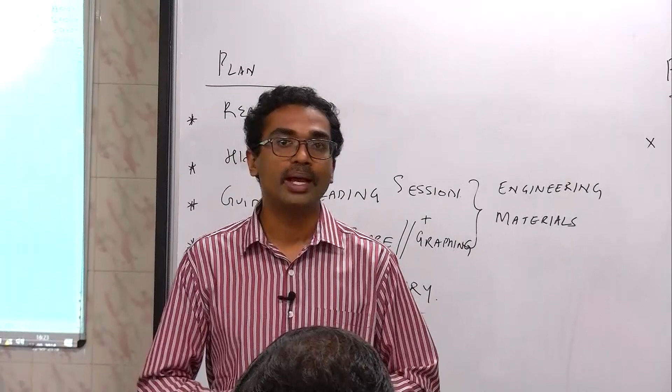I would like to start off by making another note for teachers who might be watching the Swayam course. And this comes from a question that I have been asked very often when I have conducted faculty development programs in this very room in the Teaching Learning Center here at IIT Madras. I have very often been told explicitly by teachers who work in various universities, polytechnic institutions and so on, that active cooperative learning seems to be a very nice technique. However, achieving the goals of ACL while also honoring the university requirements, particularly the syllabus completion requirements, can be a challenge. I agree, that's a challenge.

One way in which I can think about a creative solution to this problem is by basically giving some onus to the students for their own learning as well. And this is very important to the principle of andragogy. By that what I mean is we are very often dealing with adults in a university setting, so we should make them owners of their own learning.

So one thing that can be done is use ACL in order to set the framework, the scaffold for the lesson that needs to be covered as prescribed by the university, and not necessarily spend a lot of time describing everything that is there in the syllabus, but spend a lot of time trying to establish the cornerstone ideas, and then provide guidelines to the students, and also provide a framework so that the students can introspect and self-correct, do course correction and so on. So that might be a much more efficient way of integrating ACL into our classrooms.

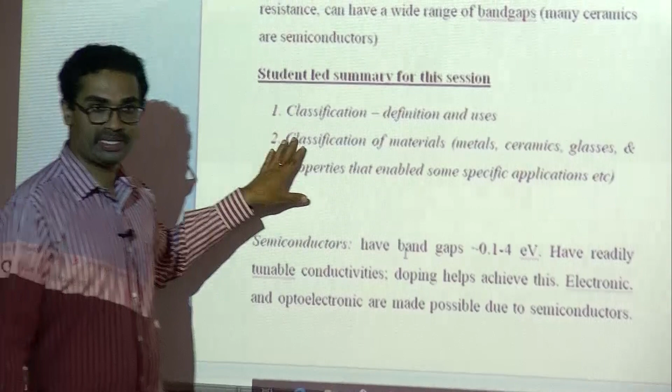So a quick recap. If you recall, these are what you yourself said were the points that summarized the last session. Briefly, we looked at what classification means and how classification can be important in any academic discipline, to consolidate information in a very structured manner. And then we looked at some classifications of materials. We did not look at all classifications of materials. We basically described metals, ceramics and glasses. We did not go much beyond that.

But I did give you some homework. So if you can give me the outcomes of that homework, if you have looked for information, that will be relevant. I remember that I asked you to look at thermal and electrical conductivities of a wide range of materials. So maybe ceramics, some ballpark values, metals, some ballpark values, polymers, again some ballpark values. So if you can give me some numbers, that will be nice.

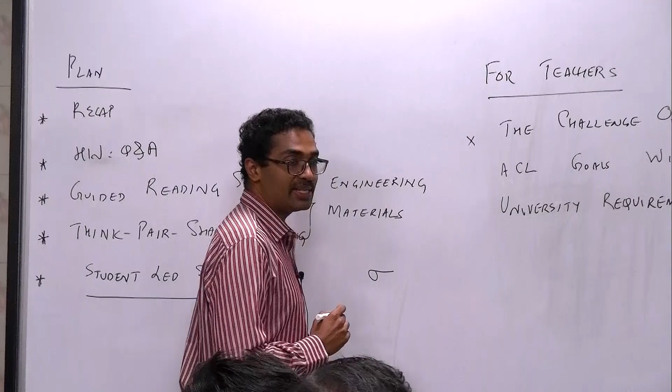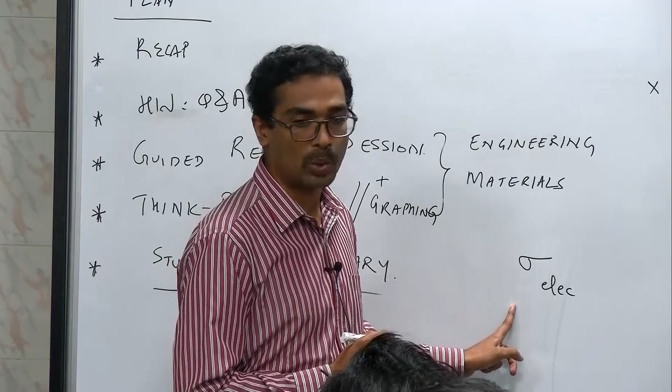So typically the electrical conductivity is represented by sigma. Now this can be a little confusing, isn't it? Because in the last class I used sigma for describing stress. So just to make a distinction, I will call this sigma elec. So this is the symbol that we will use in this course for electrical conductivity, and kappa is going to be used for thermal conductivity. So this is what we will be using for electrical conductivity, and this is what we will be using for thermal conductivity.

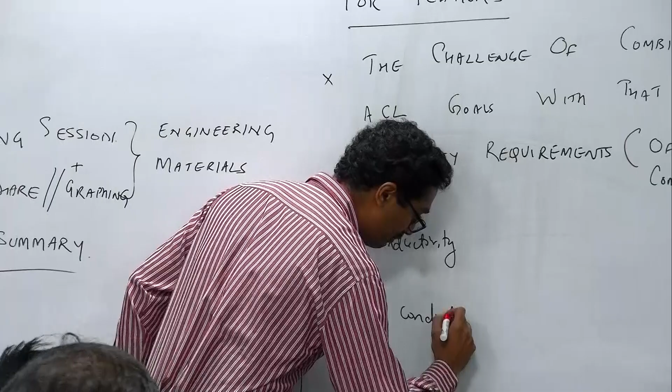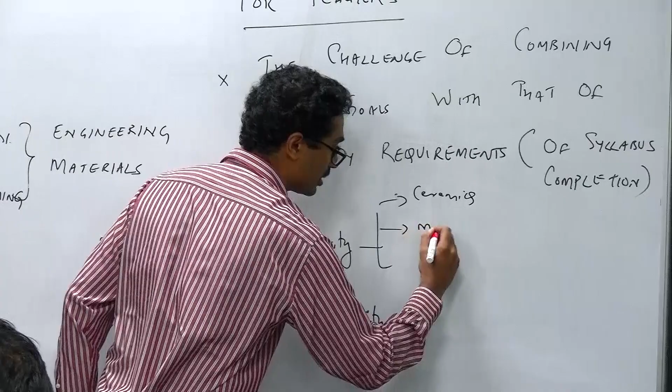So can you give me some values? I am sure you would have seen some databases and so on. So maybe for ceramics, some values, metals, some values, maybe polymers, some values. How many of you had a chance to look at these values? If you have not, maybe I'll give you a minute or two to use the internet and find these ballpark numbers, okay? And you will have to give me units in every single case. All right?

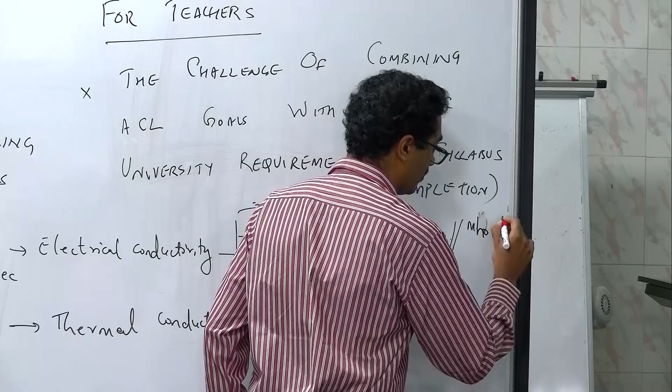So for metals it is 10 to the power of 7. Siemens is also called ohm inverse or mho. All right, so I will write it. So this can also be mho meter inverse, right? So this is Siemens or mho meter inverse.

Very good. So did anybody get the values for ceramics? 10 power minus 9. Wow. See how different it is, isn't it? So it's, let's say, 10 to the power of minus 9 units. Same, Siemens per meter. So how different are these powers? 10 to the power of 16, right? So there are cases wherein this ratio goes up to 10 to the power of 20 and more.

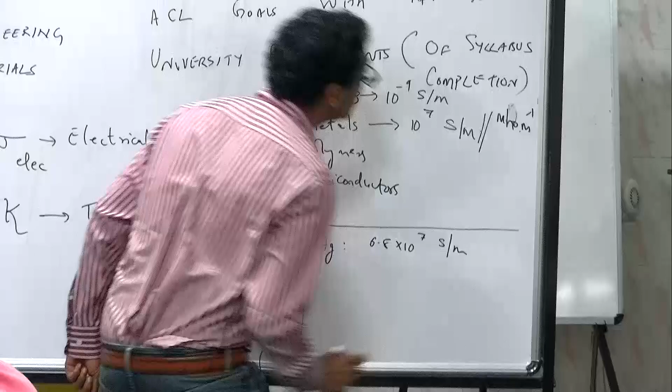So if I look at the conductivity of the best metal, let us say silver, and the conductivity of the worst ceramic, let us say quartz. So why don't you give me those two numbers? Spend some time looking at your search engines. Okay, you want to give me silver's sigma. All right, please. 6.8 times 10 to the power of 7 Siemens per meter. Now that's similar to what you have given, right? This is also about right.

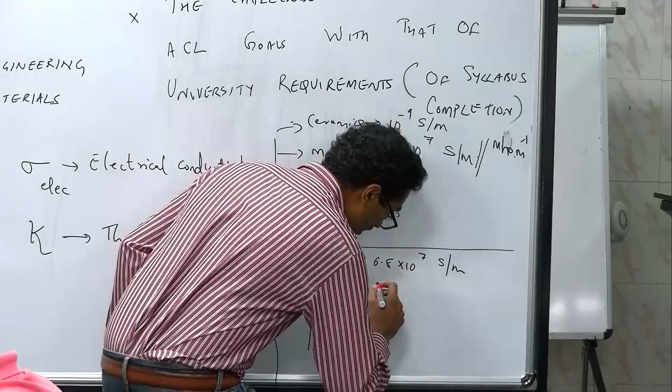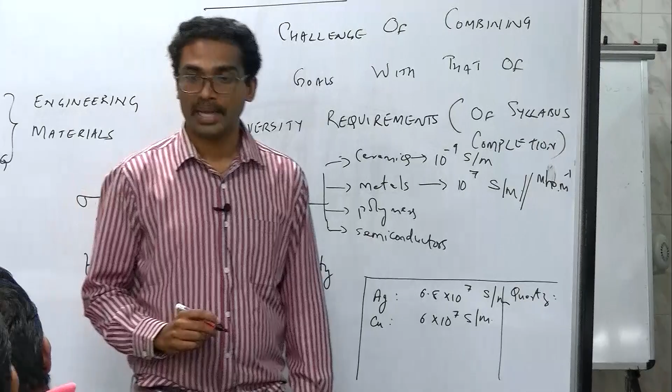And copper. Okay, you want to give me copper's also? 6 into 10 power 7. 10 to the power of 7 Siemens per meter, fine. Now let us look at some ceramics. So let us say quartz. What is the value? Quartz, electrical conductivity. So this is electrical conductivity: 10 to the power of minus 18 Siemens per meter.

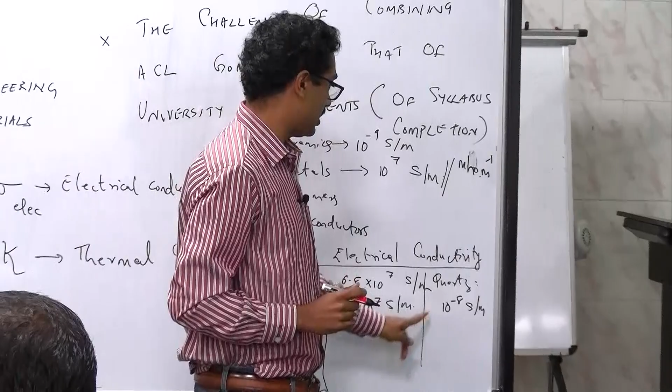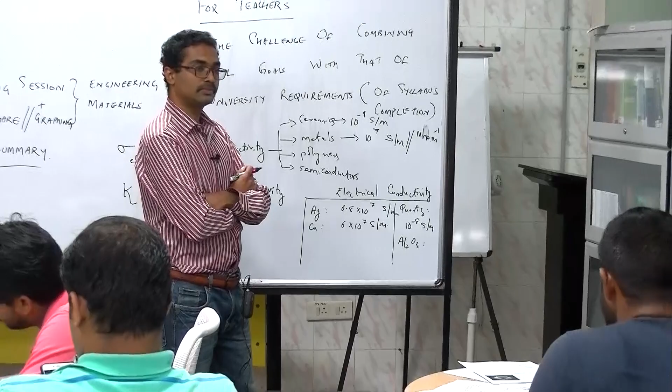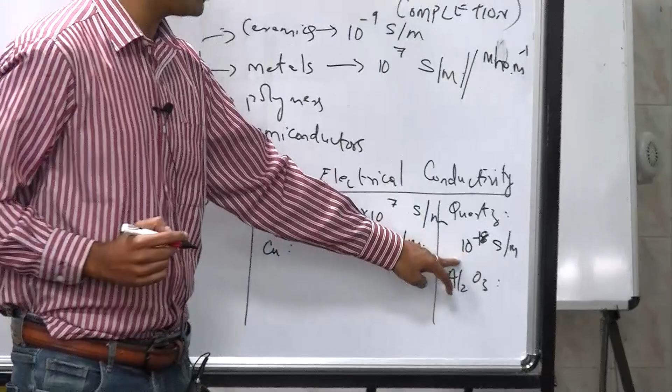Wow, look at this. And let us say alumina. Can you look at alumina, Al2O3? It's not 8, it's 10 to the power of minus 18. So the quartz is 10 to the power minus 18. Okay, all right. So if you take the ratio, it is 10 to the power of 25. Incredible, isn't it? A physical property varying over 25 orders of magnitude. Amazing, isn't it? 10 to the power of 7 here, and here is 10 to the power of minus 18.

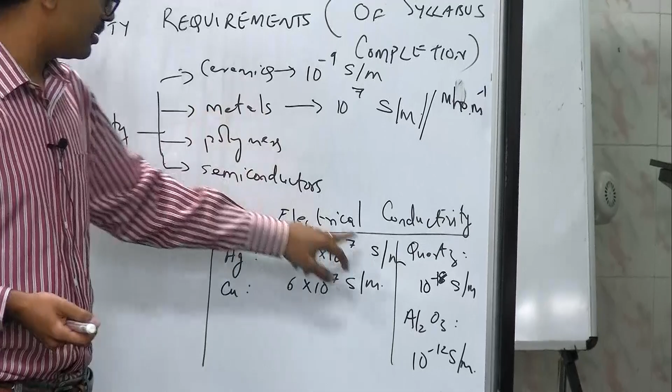Okay, alumina. This is 10 to the power of minus 12 Siemens per meter. All right. So, of course, the lesson learnt is, what is the SI unit of conductivity? Siemens per meter. For ceramics, the conductivity can be as low as 10 to the power of minus 18 or even lower. In the case of alumina, it is 10 to the power of minus 12. If you take the ratio between the conductivities observed for metals and ceramics, it can be as high as 10 to the power of 25.

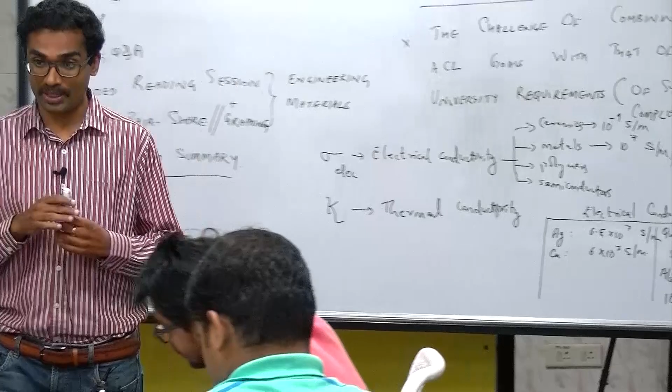You can see that. And in fact, there is no physical property which in SI units actually spans such a wide range. There is absolutely no other physical property, whether it be specific heat capacity or thermal conductivity and so on. Nothing spans this extraordinary range of values like electrical conductivity does. So electrical conductivity, measured in SI units, offers the widest window in the world of materials.

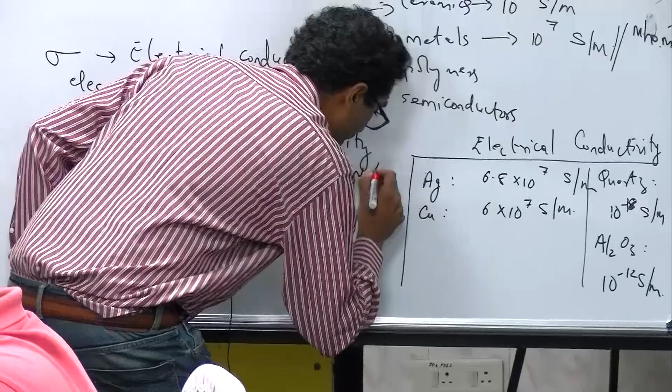All right. So let's look at thermal conductivity now for the same materials. Silver is like 419 watt per meter Kelvin. So what is the SI unit of thermal conductivity? Watt per meter Kelvin. Very good. So this is 419, and copper is 385. So not that different after all.

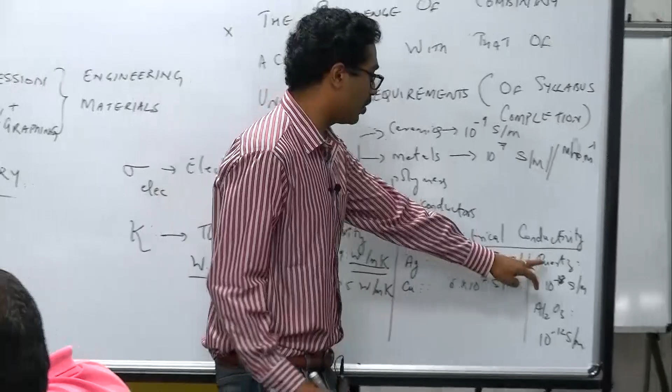Okay. Now for quartz, why don't you also look for some numbers? Let's give people 1 minute. You can distribute the load. One of you can do quartz, the other can do alumina. Thermal conductivity. Let people spend some time. It's good to know how to use search engines to gather information.

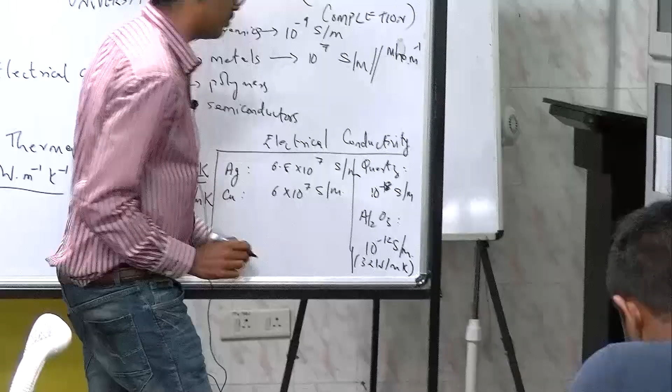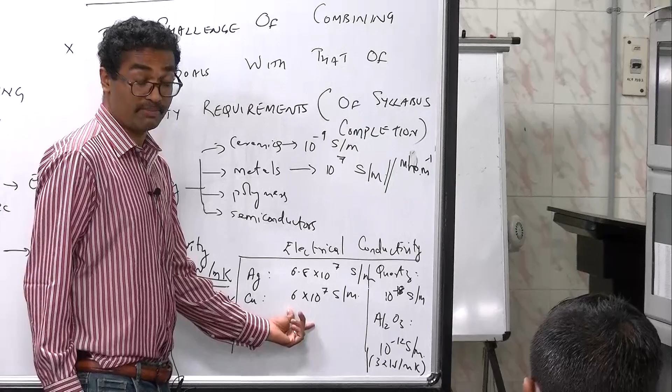Right. Similarly, I told you a thumb rule last time about tensile versus compressive strength of ceramics. What did you see in the last class? Electrical conductivity is more as compared to thermal. Oh, much more. But you see, the units are different. Here it's watt per meter Kelvin, here it is Siemens per meter. In Siemens per meter, silver and copper have very high electrical conductivities, 10 to the power of 7 with some prefactor. Quartz is very small, 10 to the power of minus 18.

And look at the ratio. It's going to be 10 to the power of 25, right? But if I look at the ratio of the thermal conductivities, the thermal conductivity of metals is higher, roughly 10 times higher than that of ceramics. Did you notice that? Likewise, in the last class, I told you something about strength. So, compressive strength of ceramics versus tensile strength. Which one is higher?

So what is the typical tensile strength that you saw? 500, 400, in units of megapascals. Okay. Compressive? That is 5,000. 5,000. And what about Young's modulus? That is gigapascal. It's in gigapascals, right? How many gigapascals? 450. So a few hundred gigapascals.

So roughly 1/1000th of the Young's modulus is the tensile strength. Is that correct or wrong? 1/1000th, correct. And 10 times the tensile strength is the compressive strength, roughly. So these are thumb rules that you might actually benefit from. Alright, so shall we also do the similar exercise for polymers and semiconductors? Because that will enable us to go through the write-up very easily.

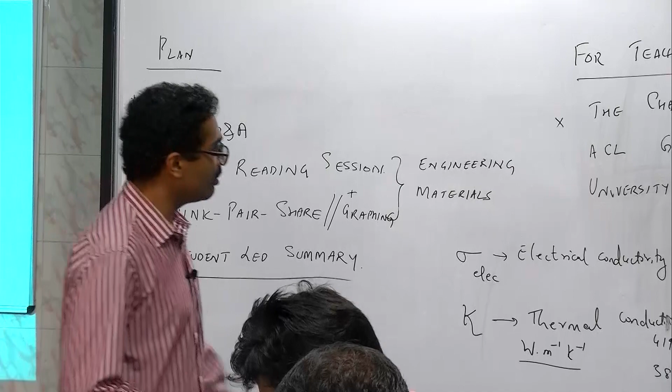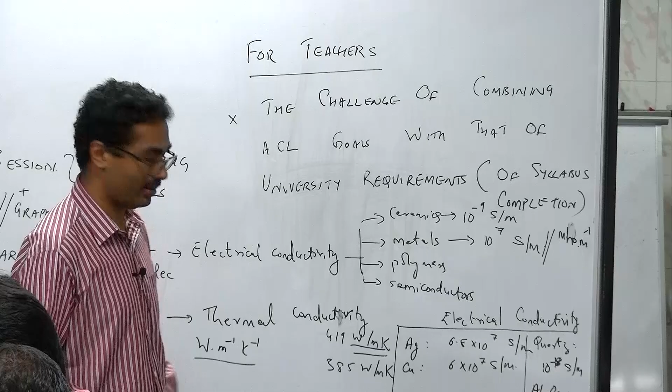Alright, so spend 1 or 2 more minutes, discuss with one another. You can load share. Some of you can do for polymers and some of you can do for semiconductors, but then tell me the numbers together. So remember there are a wide range of polymers. Please spend some time looking at the sigma and kappa values for polymers and semiconductors. Polymer is 2.23. No, you write down and I'll come around. But all of you understand what you are expected to do, right?

Good. So, a characteristic of semiconductors is that their conductivities again vary by a wide range. And in fact, semiconductors can have tunable conductivity. For example, silicon versus doped silicon. Doped silicon can have very high conductivity when compared to silicon. So look at, let us say, N-type silicon, P-type silicon, just silicon. Similarly, some semiconductors other than silicon. I have given some formulae here: gallium arsenide, gallium phosphide, indium phosphide, indium arsenide, silicon carbide, silicon.

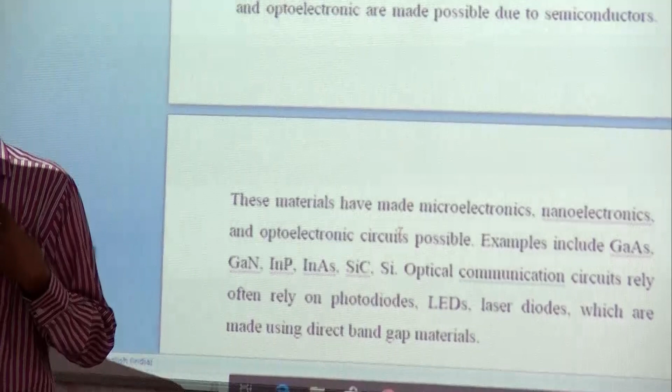So you can choose 2 or 3 of these. When they are N-type, what is the conductivity? When they are P-type, what is the conductivity? Intrinsic, what is the conductivity? You can take any one material and tell me the values, okay? Because that will give you an idea of why semiconductors are so widely used for electronics. And the reason is because you can actually tune their conductivity over a wide parametric window.

So what are you all doing now? You are looking at the thermal and electrical conductivities of polymers, correct? So you'll have to tell me what the polymer is. So polymer, both thermal and electrical conductivity. Similarly, semiconductors. For semiconductor, you'll have to tell me the formula. You can choose one of the formulas that I have given, and then tell me the thermal and electrical conductivity. Ideally for doped and undoped cases, because that will be interesting.

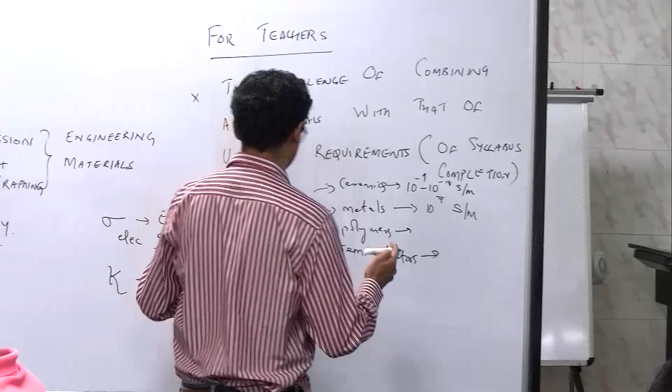So, do you have the values? Yes, sir. Thermal conductivity. Okay, very good. So, polymers, you can tell me the electrical conductivity first, typical values. Thermal conductivity, okay, tell me. PTFE is 0.25. So PTFE, that is polytetrafluoroethylene. Very good, yes. 0.25 watt per meter Kelvin. Very good.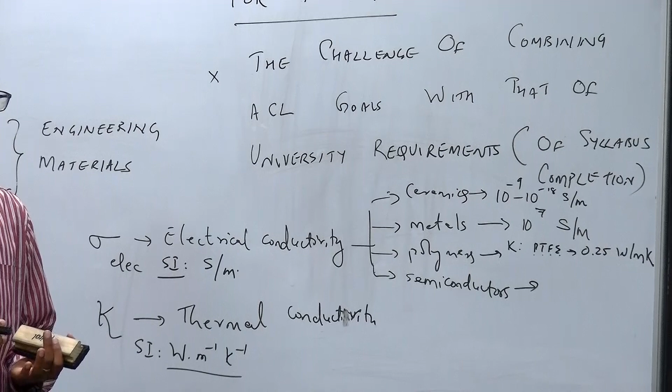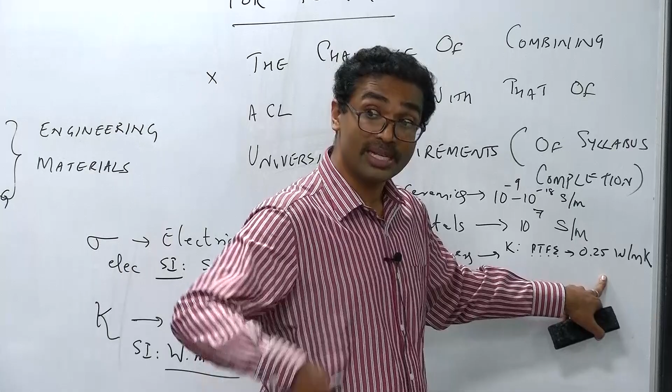Now, compare that with the earlier value. Earlier, what was the value you got for ceramics? Ceramics, it was like 32. 32. So, ceramics was a good 100 times better than polymers as far as thermal conductivity is concerned. And metals was 10 times better. So, polymers are 1/1000th as good thermal conductors when compared to metals. Ceramics have a thermal conductivity that is 1/10th that of metals in SI units. And polymers, it's very fractional, 0.25.

So now can you put some reason to that kitchen experiment that I told you? You can use kettles, but to prevent burning, you can use plastics. And the reason is because plastics are insulators. Their thermal conductivity is 1/1000th the thermal conductivity of metal. So they don't conduct heat, and as a consequence they protect you, right?

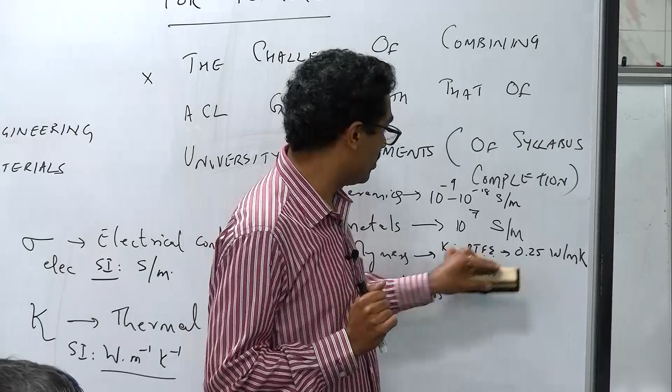So very good. Now let us also write down the thermal conductivity and the sigma elec value. Less than 10 to the power of minus 12 Siemens per meter. Okay. So would you consider them to be insulators or conductors? So conductors are like metals, no? 10 to the power of 7.

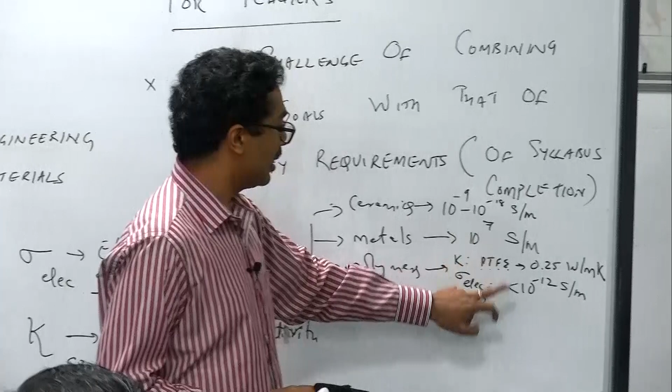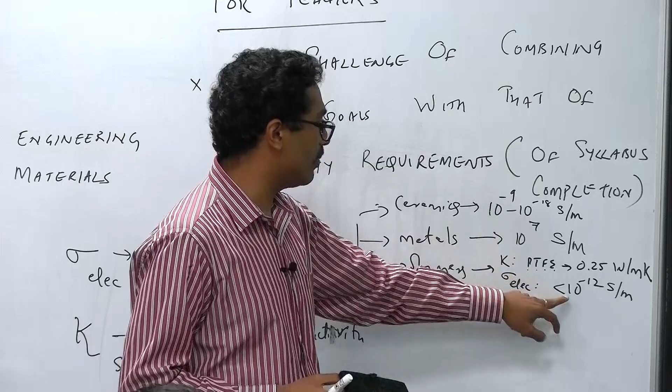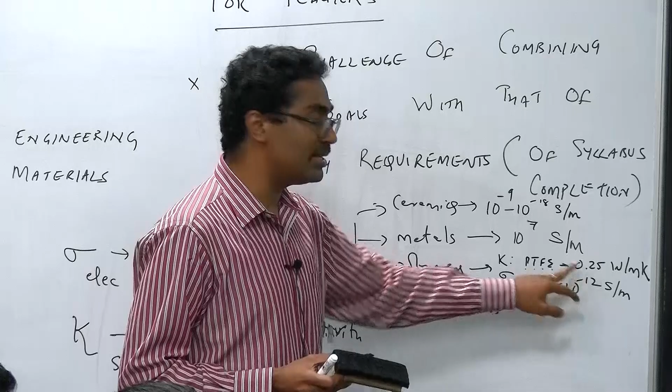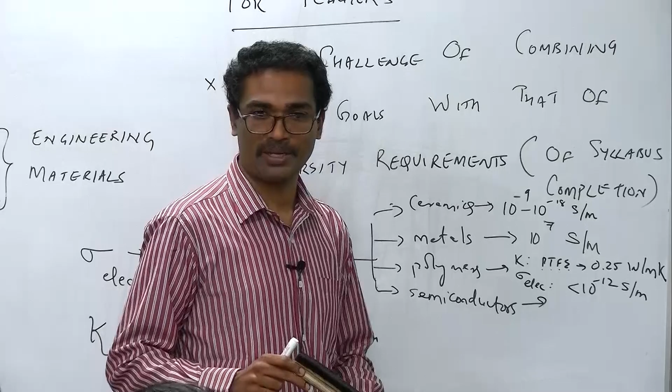Ceramics, you see, you have a value of 10 to the power of minus 18 to 10 to the power of minus 9. It's a very wide window, correct? Now, polymers, you will find that this is by and large the window. But then there is a category called conducting polymers. Why don't you look for the conductivity associated with a conducting polymer, just any conducting polymer. There are a wide range of conducting polymers. They are called PANI, for example. There is polyaniline, polyacetylene, and so on.

So take a look at the sigma values for the same. Is it clear to you what I am asking? So there are a category of polymers called conducting polymers. Let us look at the sigma elec, that means the electrical conductivity measured in Siemens per meter or mho meter inverse. Do you have some number? Just any number. It could be for any of the conducting polymers out there.

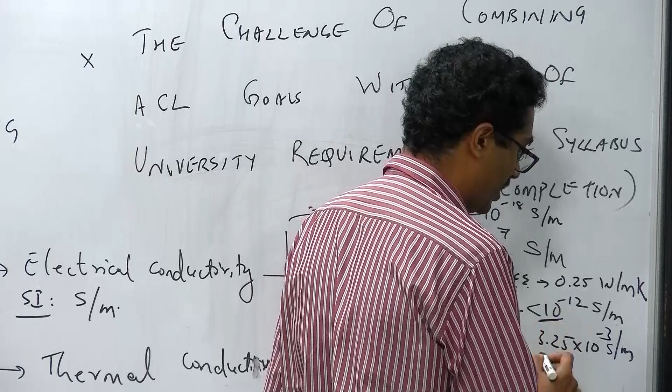It's like 3.25 into 10 power minus. Yes. Tell me. 3.25 into 10 to the power of? Minus 5. Siemens. Wow. Look at that. Siemens per centimeter. So can you convert Siemens per centimeter into meter? Minus 3. Compare this, 10 to the power of minus 12 with 10 to the power of minus 3. So it's a billion times better than other polymers. And in fact, it is much better than most ceramics.

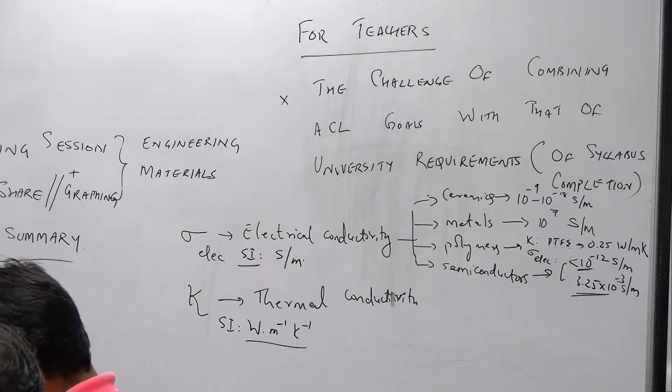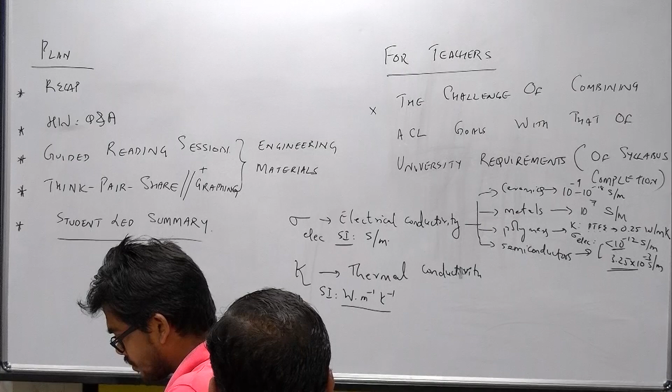So there is this interesting class of polymers which has a billion times higher electrical conductivity. Right? The typical polymer has an electrical conductivity of 10 to the power of minus 12 Siemens per meter, this one has 10 to the power of minus 3 Siemens per meter. It's a billion times higher. It's tremendous. Okay, and it might be interesting for you to actually think how this is possible. How can you change a polymer so that it has a billion times more conductivity? It's very dramatic, isn't it? In fact, it's better than almost all of those ceramics. The only thing that it is not better than is metals, correct?

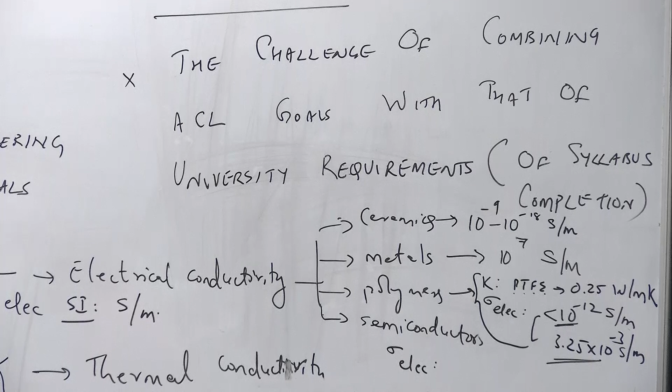Okay. Gallium arsenide, it is 52 watt per meter. So, one second. So, that is comparable to any other ceramic, correct? Because the thermal conductivity of these compound semiconductors is comparable to whatever you found for ceramics. So, no surprise there. Alright. Now, let us look at the conductivity values. For gallium arsenide, let us say intrinsic, p-type, n-type. You understood? So, why don't you discuss it? Show one another your numbers that you are getting. Please discuss with one another.

You can choose your own compounds. It can be gallium arsenide, gallium nitride, indium phosphide. All of them have a property called band gap, by the way, that can vary quite a bit. Yeah, you write down. I'll ask you.

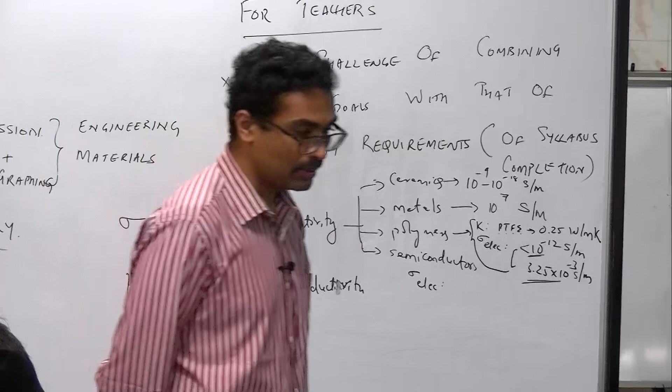You understand the question, right? It's very straightforward. The question is electrical conductivity for a semiconductor, its intrinsic type and n and p type. So, the intrinsic type is the pristine semiconductor, absolutely pure. Yeah.

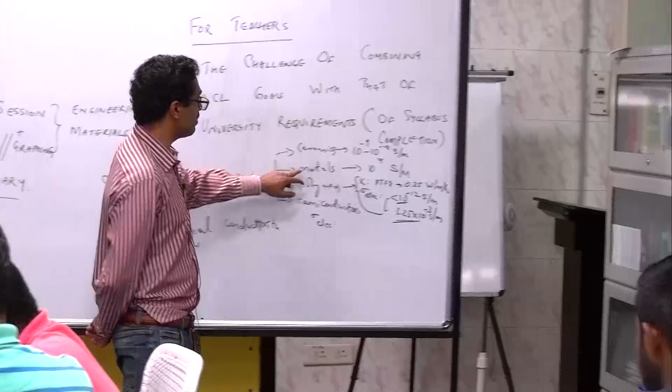See, that is very dramatic, isn't it? For gallium arsenide, that's something that I want you to register. So, it can be as little as 10 to the power of minus 8, as high as 10 to the power of 3 Siemens per meter. So, it is somewhere between a metal and a ceramic. It is much better than the best ceramic, okay, but it is not nearly as good as a metal. So, it can be 10 to the power of minus 3.

So, these conducting polymers, can you call them semiconductors? Absolutely. So, can you have polymers that are semiconducting? The answer is yes, indeed. In fact, I saw some polymers they are using for water splitting. Yes, that's right. So, absolutely anything that you can use a semiconductor for, you can in principle use these conducting polymers, semiconducting polymers. So, they are not really conducting like metals conduct, but they conduct more like semiconductors conduct.

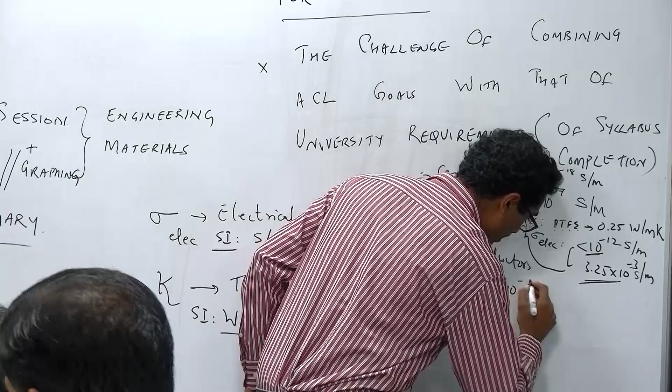Okay. So, that is interesting, isn't it? So, what are the values? Let us say for gallium arsenide, what is the value that you found? 10 to the power of minus 8 to 10 to the power of 3 Siemens per meter. Wow, that is a huge window, isn't it? So, there is no other material that shows this 10 to the power of 11 ratio between the highest conductivity that it can show and the lowest conductivity. That is the special thing about semiconductors.

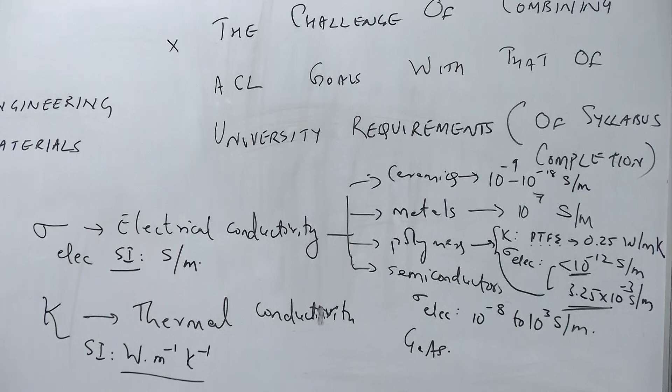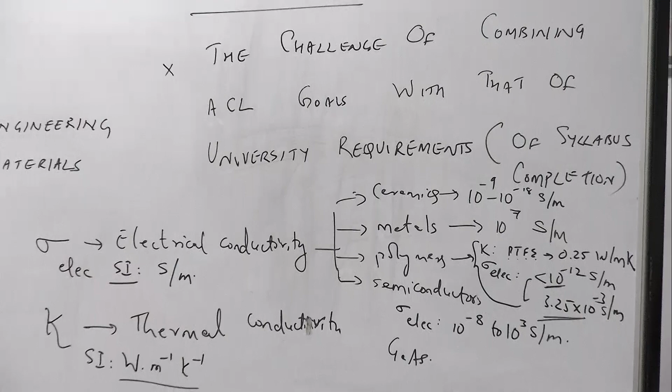Semiconductors, their conductivity can be tuned over a very wide range. Here, you are tuning it over 10 to the power of 11, 10 to the power of 12, basically 11 orders of magnitude, 10 orders of magnitude. Can you look at the sigma for silicon? So this is for gallium arsenide. Silicon, what is it? 10 to the power of minus 4 Siemens per meter to how much? 2.2 Siemens per meter. So this also is basically over 10 to the power of 4, right?

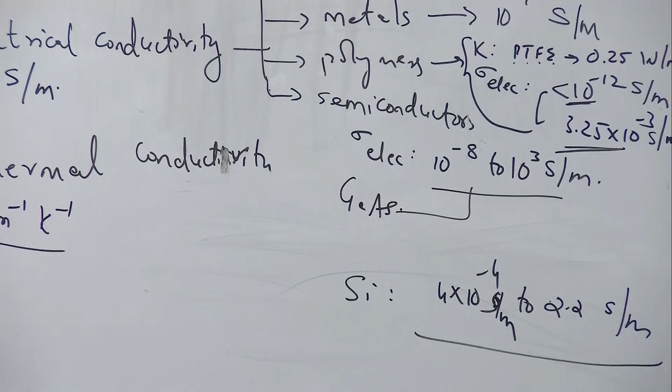So it's very huge. So you can modulate the electronic conductivity, the electrical conductivity of these semiconductors. That's really what makes these semiconductors very special. In fact, that is what enables us to use them for a wide range of applications in microelectronics, nanoelectronics. The precise details we can discuss later.

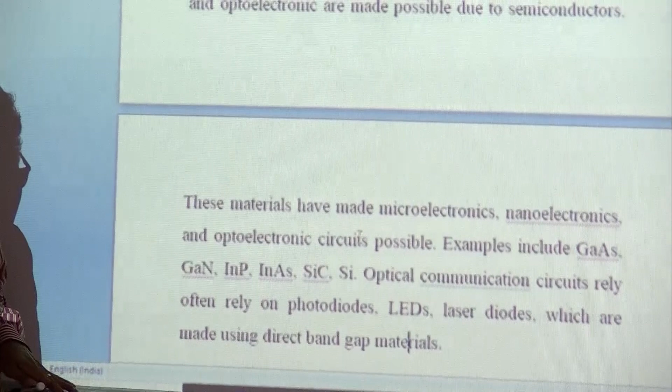But without this ability to modulate the electronic conductivity of semiconductors, it wouldn't be possible to build microelectronic devices, including things like diodes, transistors and so on, nanoelectronic devices, optoelectronic devices and circuits and so on. It just wouldn't be possible. In fact, even laser diodes, LEDs, photodiodes, all of them are enabled because semiconductors have this tunability.

Okay. Polymers and elastomers, I will just give you 2 minutes to go through. Alright, I am not going to describe anything, but look at these polymers and elastomers and always compare them with the other classes of materials, as far as the Young's modulus is concerned, the strengths are concerned and so on. The machinability, the castability, compare it with metals and ceramics, for example. Alright. Let's say impact strength, is it relevant? Think about it.

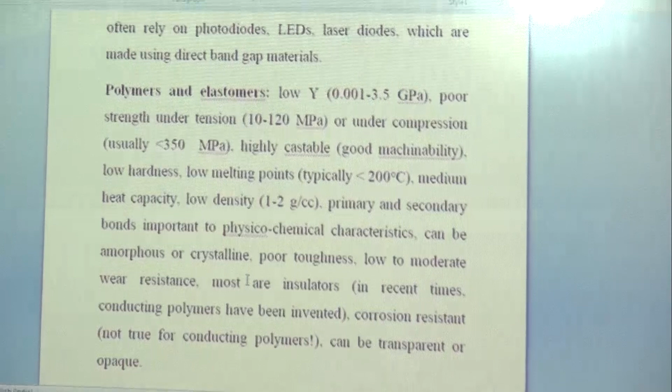So I hope all of you have made note of these numbers, because these are relevant. And last time I just mentioned high, low thermal conductivities, but today we put numbers, and you can see how important numbers are. So from now onwards, whenever you talk about parameters, talk about them quantitatively. You understand? Now that you have done some silent reading, you can discuss with one another, identify highlights and compare with ceramics and metals. That is very important. Say you get some toughness value or Young's modulus, whatever it be, compare it with ceramics and metals.

So the first thing I would expect you to look at is strength, right? So are polymers considered strong materials? No. Not at all. So under tension and compression, what are the values? 10 to 120. What's the unit? Megapascals. What was the corresponding value for ceramic? 500. So under tension it was 500. Now here under compression, what is the strength? 350. What was the value there? 5000. So clearly polymers are pretty weak. It is consistent with our daily experience, isn't it? Polymers are pretty weak.

Alright, are they castable? Can you quickly cast them in various shapes? Yes. Absolutely. Polymers are easily castable, maybe even printable. In fact, increasingly people are thinking about printed electronics based on plastics. So printed electronics is also called plastic electronics. People are thinking about printing and casting into various shapes, printing electronic devices, going away from typical fabrication. All right. Next, what is the other thing that you are thinking about?

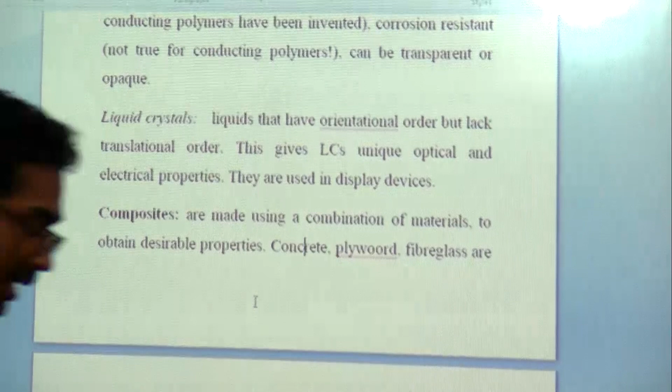So the conducting polymers that I was telling you, they tend to have very poor corrosion resistance. Most of the polymers can have fairly moderate corrosion resistance. All right. So corrosion is something that is usually taught under the label of materials degradation. Something that we will probably look at in due course, not immediately, but it is important for you to make a mental note of the fact that polymers have moderate resistance to corrosion.

Liquid crystals, it's an interesting category of materials. Have you heard of liquid crystals anywhere? LCDs, liquid crystal displays, right? So these are a very special class of materials. I won't discuss this in class, so it's going to be your search engine exercise. All right, search engine exercise. So I'll ask you about liquid crystals in the next class.

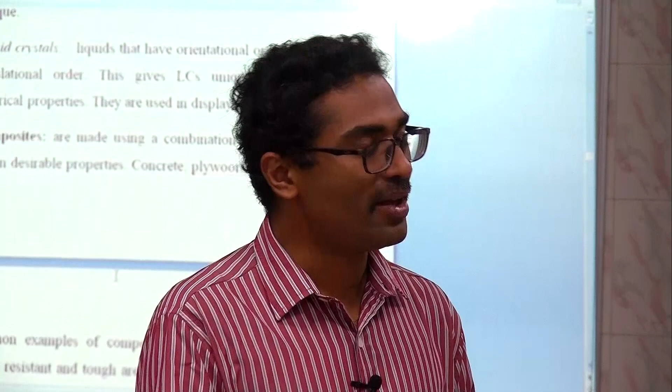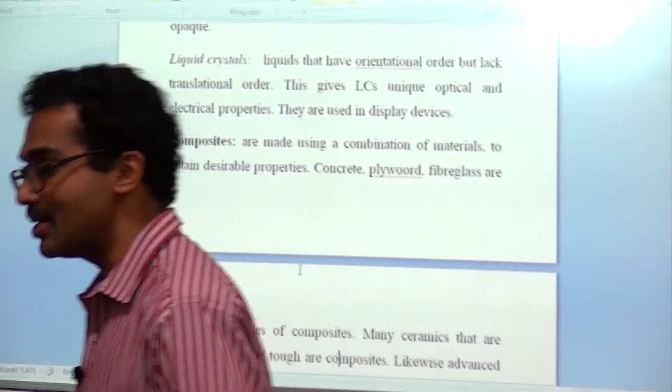So they are somewhere between crystals and liquids. Typical liquids do not have crystalline order. Liquid crystals, on the other hand, actually have crystalline molecular order, and you might want to see why it is so. The chemistries of these are interesting.

So for those who are watching this SWAYAM session, this is an example of scaffolding. You are giving them just enough hints to get them excited and giving them some keywords so that they can go and study on their own as well. And when they come back, you examine them on that particular off-classroom learning that they have done. All right.

Okay. So the next class of materials, they are called composites. So what do you understand by composite? Yes. So a composite is actually a combination of otherwise usually disparate materials. So for example, a ceramic and a polymer. They are very different from one another, but you mix them in order to give rise to a composite. Two different ceramics that are very different from one another, you mix them with the hope that you are able to actually get properties somewhere between these two materials. All right. So those are composites.

So again, spend some time reading about composites. And when you read about it, think about the composites that you might be having around you. Do we have composites around us? In fact, composites are an extremely important class of engineering materials. So please discuss with one another, talk to one another. So what do you understand by composites? Can you tell me some examples of composites around you? Are there composites in your cell phone, on your body?

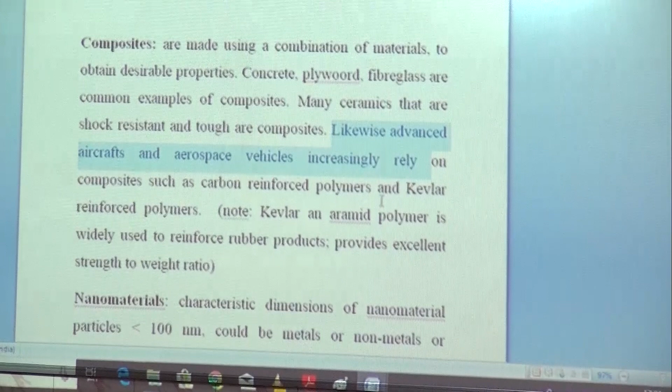A large number of modern-day materials, including aerospace materials, aircraft materials, etc., are composites. All right. And I've given an example of composites that are obtained by reinforcing rubber. This is again very important because rubber is also an important engineering material, and rubber as is is not usable. It doesn't have good corrosion resistance, it doesn't have good mechanical properties, it tends to be extremely deformable and so on. But you add Kevlar into it, and you will see the word there is aramid. Aramid stands for aromatic amide. So you add a little bit of Kevlar and the properties of rubber improve.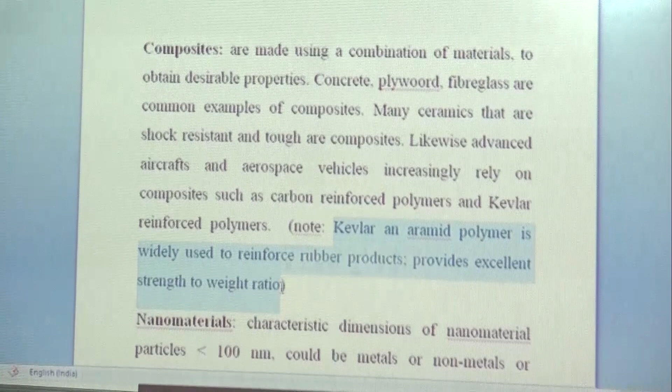Similarly, rubber can actually be made to undergo something called cross-linking, vulcanization. Over and above vulcanization, you can add Kevlar. So these are methods by which people have been able to render a material that is otherwise not easily usable for industrial applications, engineering applications. They have been rendered useful. And making composites as a consequence is a very big part of what material scientists do.

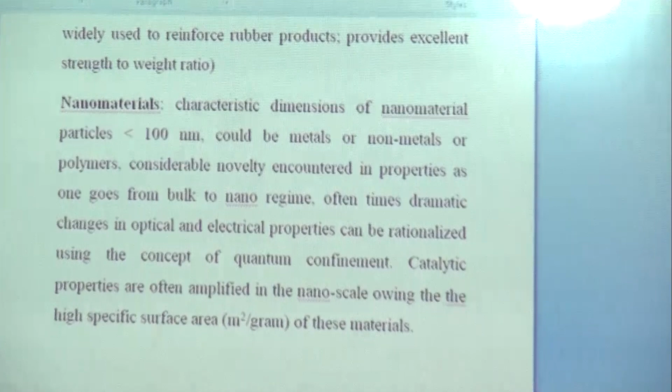All right, so now is the last category as far as our discussion is concerned. Okay, so please spend time reading about nanomaterials, the definition of nanomaterials, what they constitute. So there is one number there that is very important. Pay attention to that. Okay, so please explain to one another what nanomaterials are. Explain to one another and then I will ask one of you to explain it to me. So please discuss with one another.

And think about whether there are nanomaterials around us. Can there be nanomaterials in the biological world? Do you understand what is written? So could there be nanomaterials in this cell phone, for example? Yeah. Okay.

Could there be nanomaterials inside your body? So nanomaterials are typically having at least one characteristic dimension smaller than 100 nanometers. Alright? So one characteristic dimension. So you take an object, it can have typically 3 dimensions, at least one dimension should be less than 100 nanometers. To get a sense of how small this 100 nanometers is, let me tell you one data.

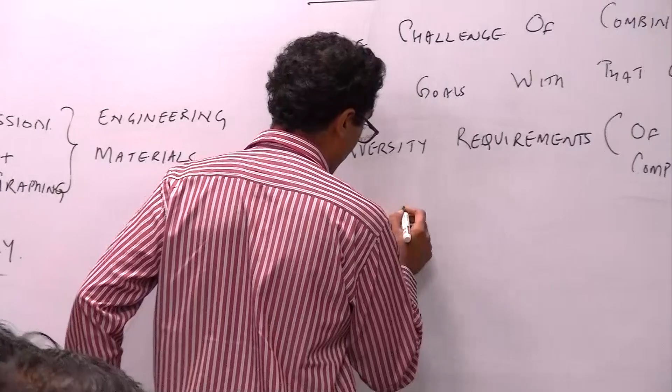The breadth of your hair is about 100 micrometers. If you have very healthy hair, it's about 150 to 175 micrometers. Alright? So let me write that number down. So the breadth of your hair is between 100 to 175 micrometers. So this is basically 100 to 175 into 10 to the power of minus 6 meters.

For your hair to be a nanomaterial or to make a nanomaterial out of your hair, how many times should you actually slice your hair? 1000 times. So your hair is sufficiently small, right? Its breadth is sufficiently little. But along the breadth, you have to actually chop it 1000 times to actually get down to the size.

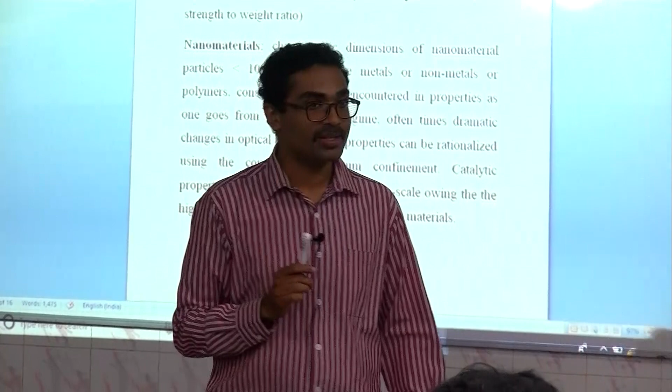So you take your hair along the breadth, you basically chop it several times along the length, so that the breadth continuously decreases. When you are doing that chopping 1000 times, 50,000 times, that is when you are actually entering the nano regime. So these are fairly small particles. Do you think you can see these particles? Certainly not. In fact, you can show this mathematically also. There is a physical argument for this.

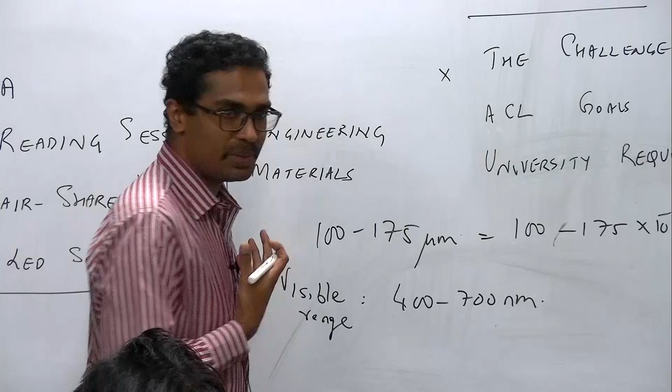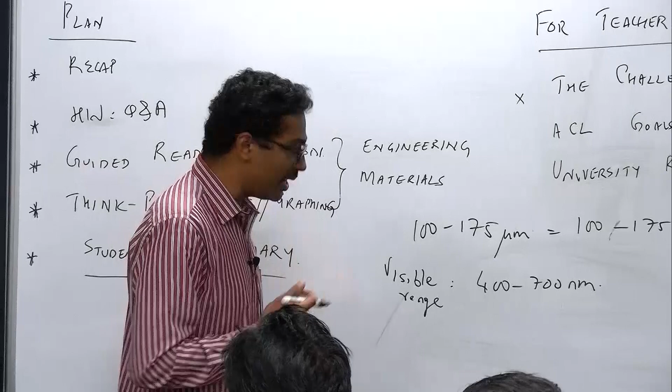So the human eye responds to the visible range. The visible range is between 400 to 700 nanometers. This visible range is entirely defined based on our experience of colors. The human eye sees this, blue to red. So that is basically this 400 to 700. So you can show that the human eye can see a maximum of, let us say, 0.1 millimeters in practice.

But if the human eye was a microscope, it would see down to 200 nanometers. So that is called the diffraction limited length. But the human eye never sees that. The human eye doesn't even see 700 nanometers. The human eye sees something like 1000 nanometers. So our eye is not a microscope. But if it was, then we have a diffraction limit and we would be able to see down to 200 nanometers. What you see is not 200, what you see is 5 into 200, 1000 nanometers.

That's not true either. So I'm talking about 0.1 millimeters. 0.1 millimeters is basically 100 micrometers. So what the human eye sees is much lower than that, right? Because if the human eye was a microscope, it would be lambda by 2, so that's 200. But what the human eye sees is 100 micrometers. So that's basically 1000 times higher than that, substantially larger.

Okay, very good. So nanomaterials, why would it be interesting to make these small particles, these small materials? And I asked you, do you have nanoparticles around you? You said that your cell phone has nanoparticles. Where is nanoparticle hidden in your cell phone? Batteries, very good. Surface coatings that are used are very often nanoparticles. Yes, very good. The kind of surface coating that is actually used to make it water resistant, hydrophobic coating, tends to again use nanoparticles.

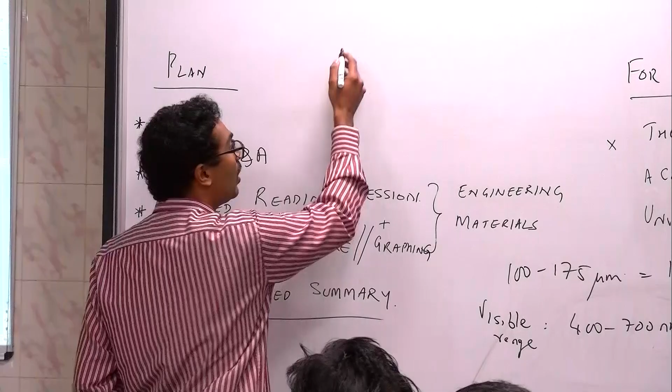So I have an exercise for you, and this will be a classroom activity. You consider a particle to be a sphere, plot surface to volume ratio as a function of radius. Plot it. So surface to volume ratio, and this one is something called specific surface area.

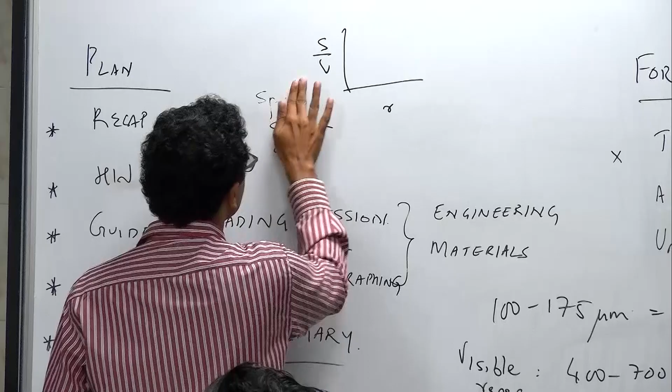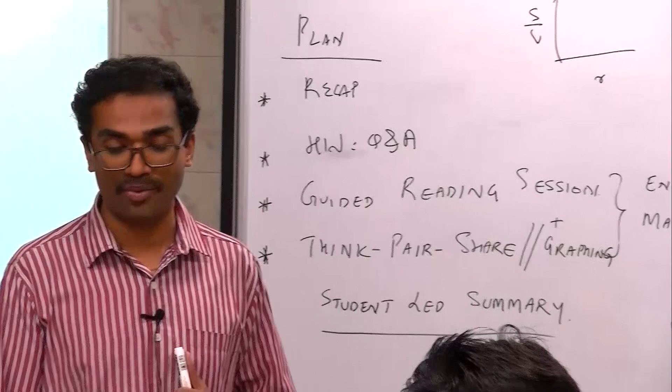Actually, area per unit mass. So let me just correct myself here. This wouldn't be specific surface area. It's just surface to volume ratio. So surface of a sphere is what? Formula 4 pi r square. Volume is 4 by 3 pi r cube. So what is S by V? 3 by r. So I am basically asking you to plot 3 by r as a function of r. How will it look?

So the smaller the particle, higher is the surface per volume, right? And this is in fact why people in catalytic science use nanomaterials so often. Because when you go down in size, you have so much surface for any given unit volume, and as a consequence you can accelerate reaction rates and so on. You understand? Okay, very good.

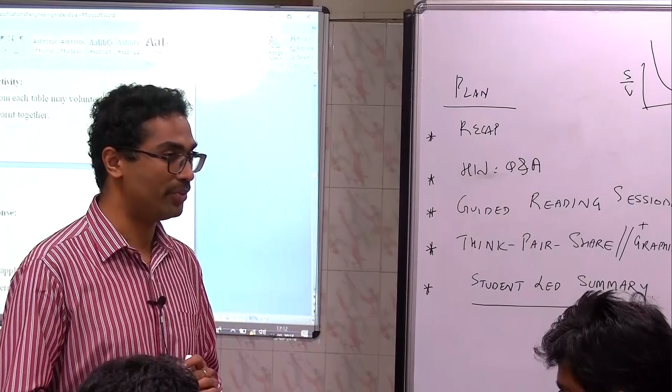So we will now conclude with a classroom activity. I would like you to discuss the summary of the last session, number 1, and one per table will summarize the session for us. And number 2, this is a homework. Think about making a list of applications for polymers and nanomaterials. That's B question, right? I'll convert this classroom activity into a homework. And we still have not gotten to the graphing exercise, so we'll get to that maybe next session.

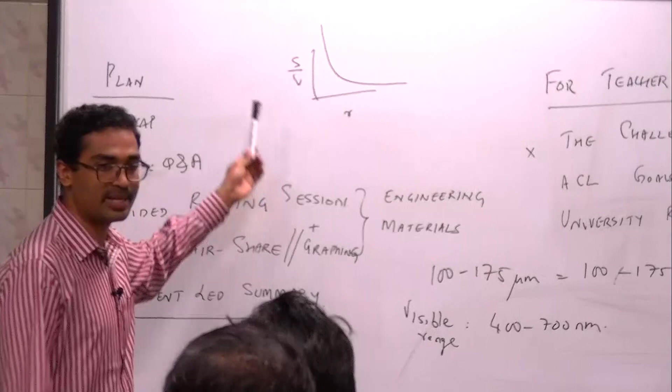And this is sort of a graphing exercise, right? I asked you to derive and plot S by V as a function of R, and as a consequence we rationalized a certain application, namely catalysis, and found a reason why nanomaterials are used in catalytic science. So this is a graphing exercise. In the next class I will give you a graphing exercise on tensile stress test.

The homework is you identify, let us say 5 or 6 or any number of applications for nanomaterials and some applications for polymers. And you can get creative, you can come up with your own plausible applications based on the properties. Now you please help me summarize this session. So the content summary, and then I will give a summary for the teachers, and then we are done for this session. Yes, content summary please.

So we have learnt about semiconductor and stuff. Very good. We learnt about electrical and thermal conductivities, right? Did you learn something about the SI unit? What is the SI unit of electrical conductivity? Siemens per meter. It's also called mho per meter, right? And what is the SI unit of thermal conductivity? Watt per meter Kelvin. What are the typical values for metals, ceramics, semiconductors? So can you remember the typical value for metal, let's say for electrical conductivity? Very good. So it's 10 to the power of 7 in SI units, right?

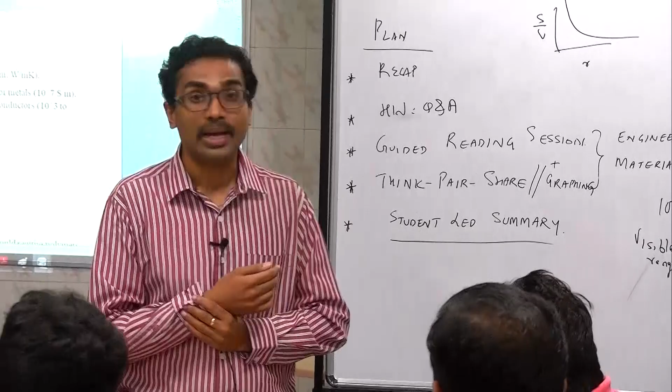And with that, and also the additional pointers that I gave regarding large classroom settings, wherein it might be a good idea to decentralize the learning and enable learning through groupings done in a very specialized, goal oriented manner, you might be able to still manage large classes. So those were the two things that I wanted to communicate in today's session over and above the content that we discussed.